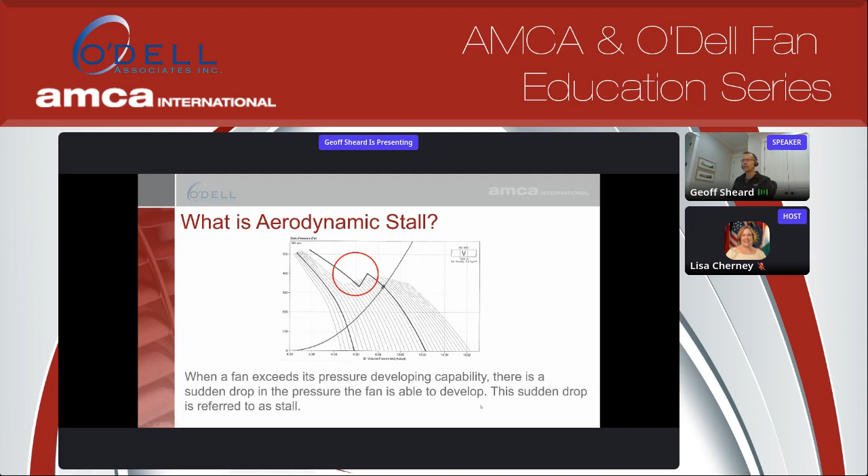It's the practical consequences, so we see the pressure falls with decreasing flow and then recovers somewhat. But what's happening there in practice is that before stall, the flow is going through the blading as intended. As we get to stall, the outlet pressure is higher than the inlet, and it becomes too great for the blading, so the flow starts to break away. That manifests itself as turbulence, buffeting - the fan's simply not operating as intended, and there are a variety of negative consequences associated with that.

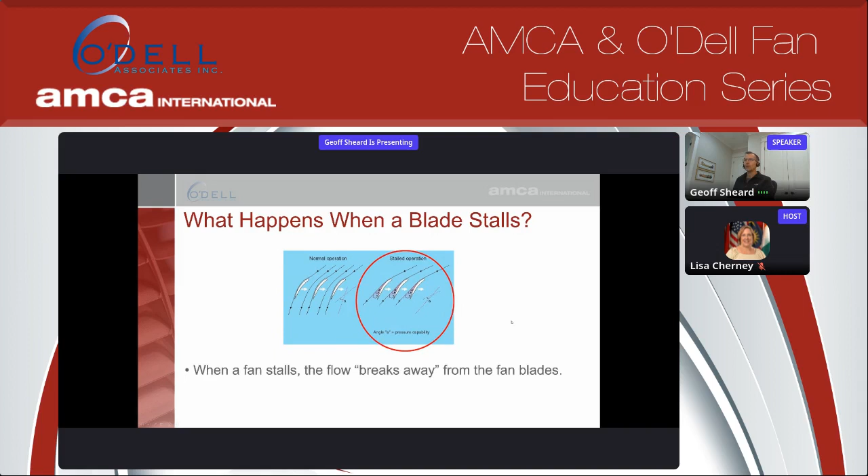It's helpful just to think in terms of different types of fans when considering the significance of stall. If we look at a centrifugal fan over here on the right, number B, the flow comes in axially and out radially. Cross flow fan: in radially, out radially. Mixed flow fan: in axially, out at least partially radially. So an axial fan is unique in that the flow comes in axially and goes out axially.

That's significant because as you approach stall, the flow through the blading slows down. The axial fan impeller is still rotating, so it's thrown out under the action of centrifugal force. So if you have a centrifugal, cross flow, or mixed flow fan, the fact that it's thrown out radially by the simple fact the impeller is rotating is a mitigating factor. In an axial fan, the flow is not supposed to go radially, it's supposed to go axially, and if it does go radially, it ends up on the casing. The outlet pressure is higher than the inlet pressure, so the flow ends up getting driven out of the inlet, which is not what anyone wants.

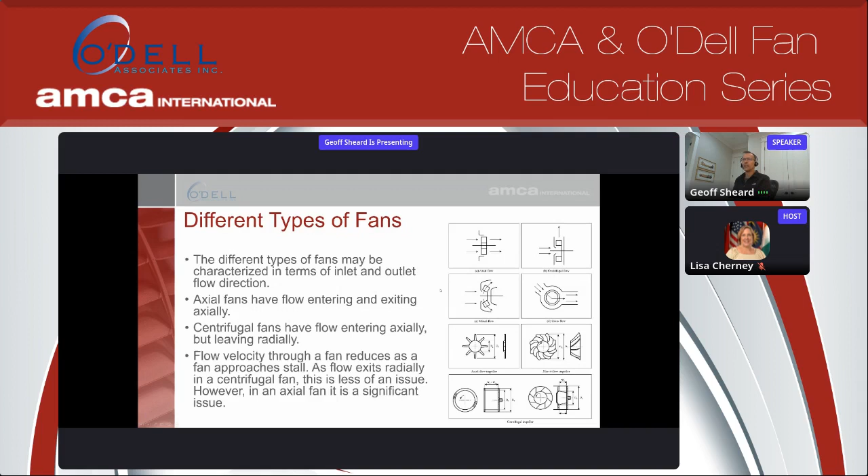So that results in the axial fan having a more severe stall than any other type of fan. It's not to say other fans don't suffer the effects of stall, but it's not generally as severe. We can see that in this next slide - this is a collection of fans with some comparability described here, A through G, and we can see this is your highest pressure centrifugal. It's a steeply rising characteristic, and it only falls very close to shut off. You'd never actually operate a fan here unless you accidentally closed a damper.

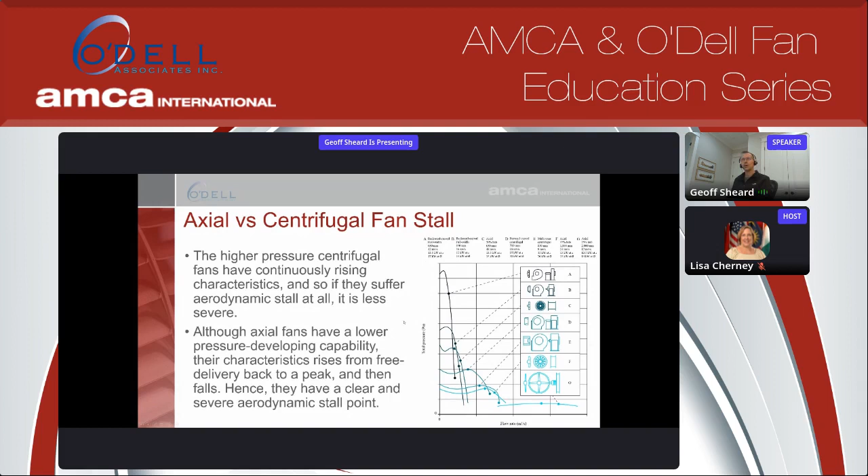But if we look at this typical axial fan here, we're rising and we're falling really quite far from zero flow. There's a lot of opportunity to operate the fan accidentally in this region. So axial fans have characteristics which allow accidental operation in stall more freely than a narrow centrifugal fan. So the consequences of operating an axial fan in stall are more severe, and the probability of accidentally doing so is higher. So that's why we'll really focus on axial fans in today's presentation.

So, pressure pulses. I'll speak about them not because you're necessarily particularly interested in them - they may not apply to the applications you work in, but it's just a way that a fan can accidentally end up in stall, and it's equally relevant to the methods for selection strategies for managing stall.

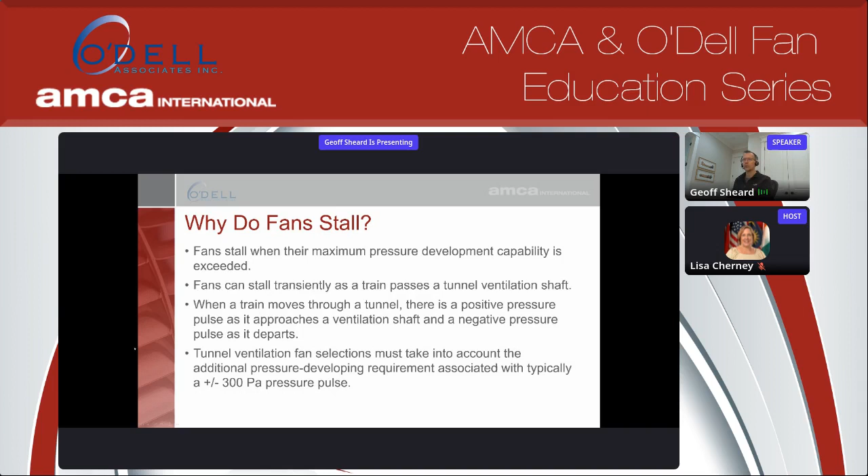When we exceed the maximum pressure developing capability of a fan, it does stall, and that can happen transiently - that will still lead to a failure. So in a tunnel, a metro system, you have tunnels with trains running in them. Typically you have a positive pressure pulse - there's a piston effect as the train goes down the tunnel, so a positive pressure pulse of maybe 300 pascals in front of the train and 300 behind.

One thing that became popular initially in Asia, but also Europe, was the use of platform screen doors. There were some extremely unfortunate accidents where in very crowded stations, people got literally pushed off the platform accidentally in front of trains as they were coming into the station, with a predictable consequence. So these platform screen doors became popular. They remain shut until the train is in the station and the doors are open.

An unintended consequence of this was that the air in front of the train used to be able to disperse in the stations, up to a point. As soon as you put in a series of platform screen doors, you trap the air in the tunnel. So the pressure pulse more than doubled from 300 to 600 or 700 pascals, following which we had a spate of in-service central tunnel fan failures for no apparent reason.

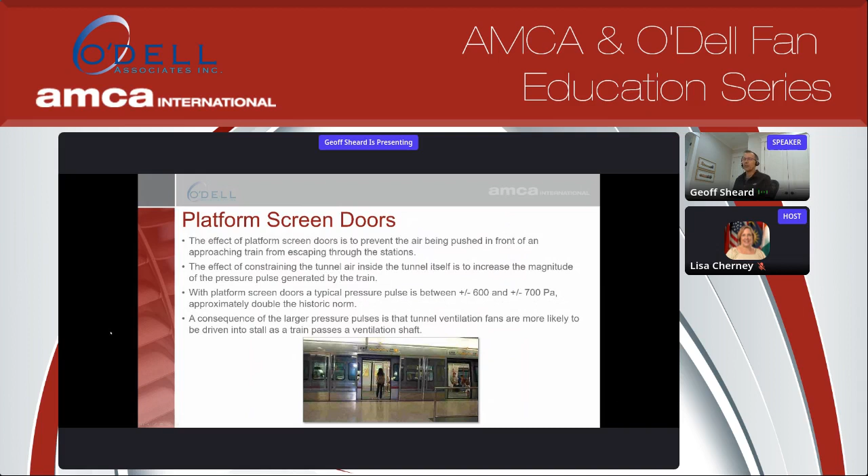So this led on to a keen interest in selection strategies for avoiding stall, and I'll run through those now. If you know what might happen at the time you design the system, then you're in a good position to select a fan appropriately. But pressure pulses are quite difficult to estimate. You don't know if somebody's going to put platform screen doors in 10 years' time, or if a new generation of trains is going to be going faster. Similarly, in any other application, you have similar uncertainties in any system that's going to be lasting for 10, 20, 30 years.

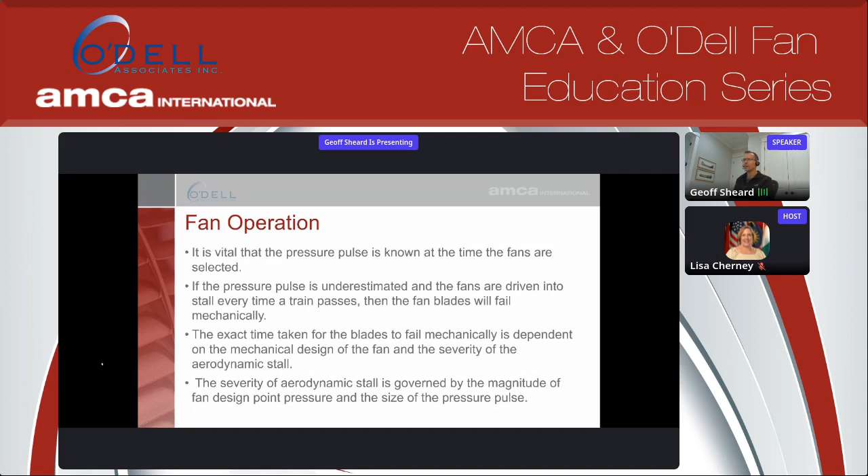We then have another variable in that just because a fan operates in stall, you don't know how long it's necessarily going to take to fail. That's a function of its mechanical design. So it will fail, but not necessarily particularly quickly. So there's a variety of uncertainties associated with the operation. And we have three basic strategies when it comes to selecting a fan.

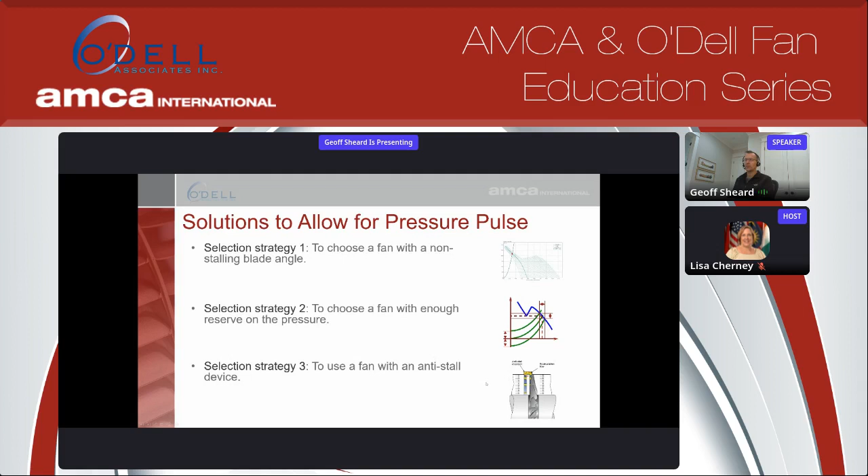One of the idiosyncrasies of axial fans is that at low blade angles, they don't stall. If they're lightly enough loaded aerodynamically, they don't stall. We can simply select a fan conservatively that can generate far more pressure than we think we need. And there are anti-stall casing treatments, which I'll come to in detail later, which can essentially provide some prevention in the effect that one does stall a fan.

At non-stalling blade angles, up to about 16, 18 degrees blade angle on an axial fan, the characteristic simply rises continuously back to zero flow. It doesn't stall - it's not heavily enough loaded to stall. The problem is you can see we're right down at about 2 meters cubed, and we may want to be operating at more like 12. So you're going to need a significantly bigger fan to get up to the sort of flow rates you expect. But nevertheless, if you're willing to spring for that, it's going to be a low risk option.

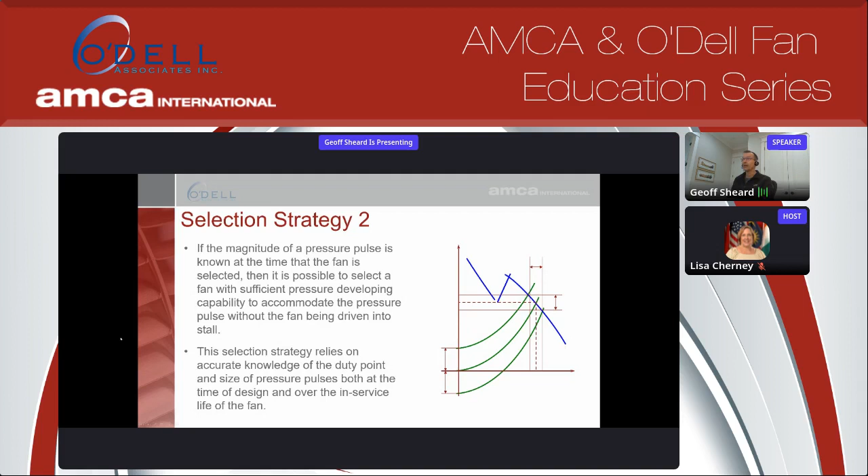If this is our nominal fan curve and these two upper and lower green lines are our pressure pulse, you can simply select with plenty of pressure developing capability above. It's a fair strategy as long as you can predict what's going to happen in the next 30 years. I always feel anyone who thinks they can predict what they're going to be doing more than a year in advance is being very optimistic. But it is nevertheless a strategy that's popular, primarily because it's cheap. We'll come to that later.

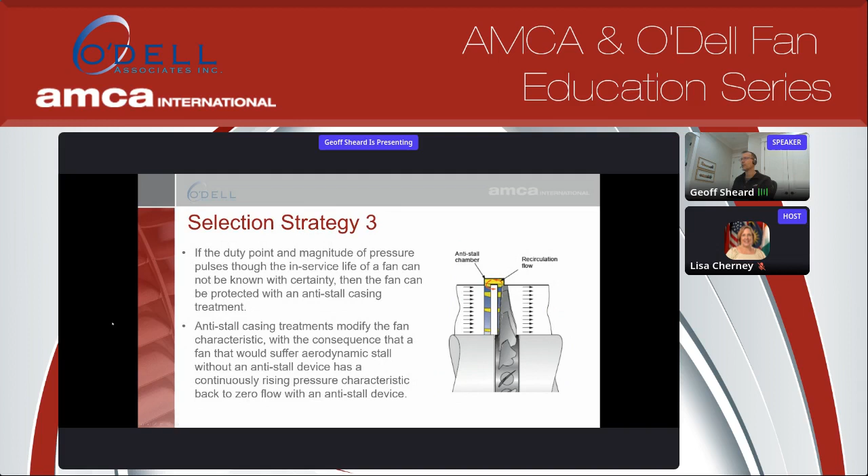Then we've got these anti-stall casings, which I'll explain in a little more detail. They're not particularly intuitive, but they work remarkably well. So if we move on to the anti-stall casing treatment...

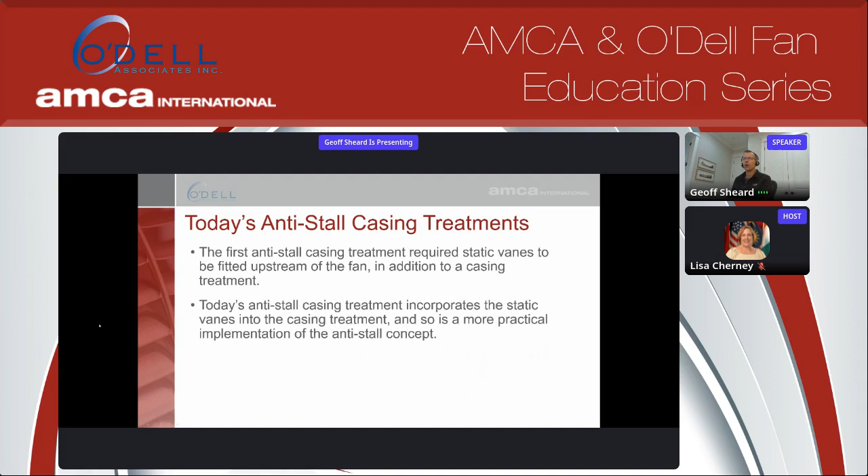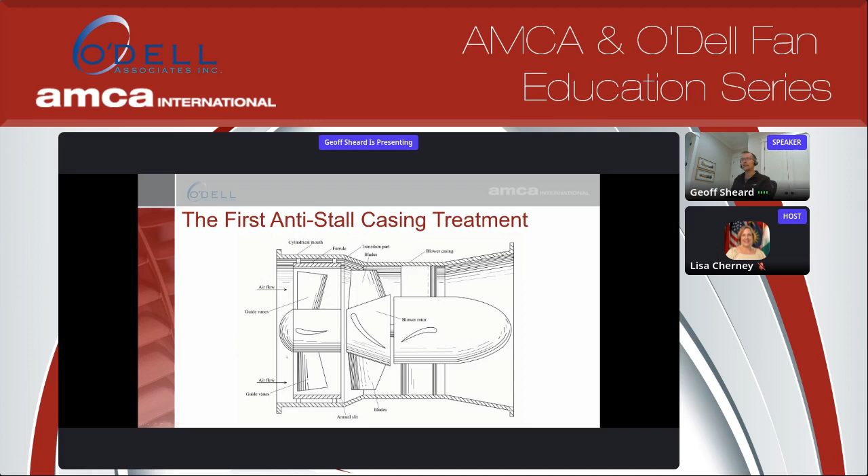It's mildly astonishing that this worked at all, because you'd think that this annular slit would leak like a sieve - it would just not really do its job. But apparently it did work, and was quite popular at the time. But this upstream element isn't particularly cost effective, and it's not good for efficiency.

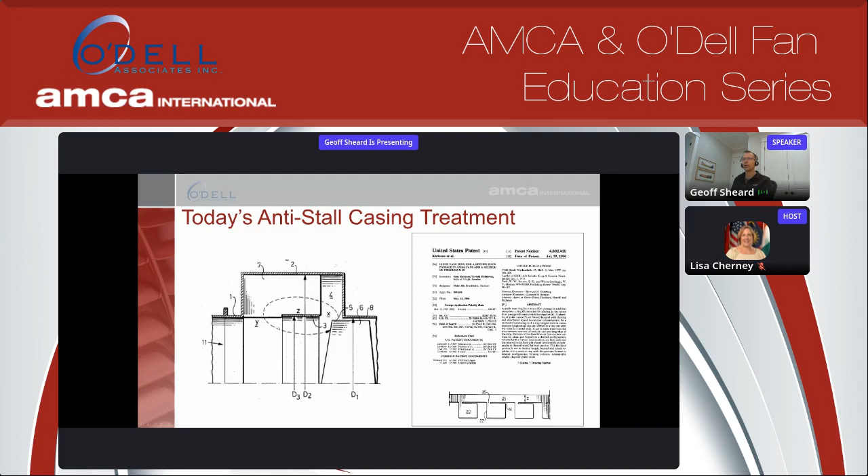There's a gap in the casing here and another gap here. These are vanes which straighten the flow up. We centrifuge flow into this region, it goes upstream and is straightened through these vanes, and then, having nowhere else to go, is reintroduced into the mainstream flow, recirculating back into the fan.

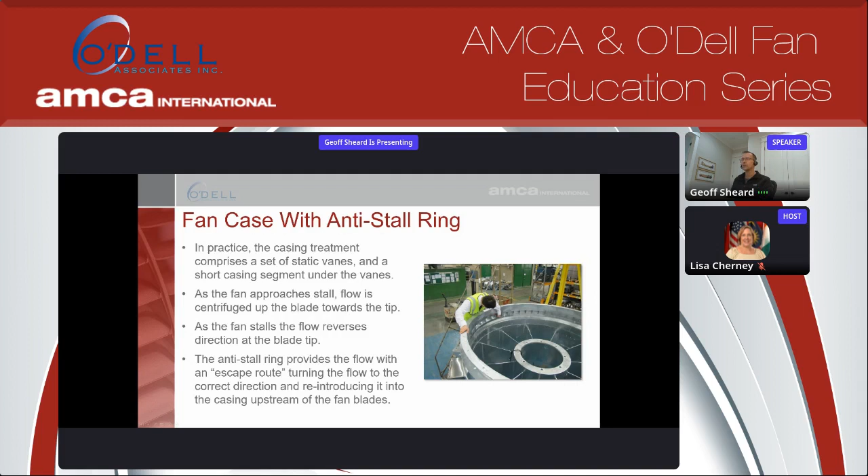This technology was industrialized and became quite routine for many years. It's still specified occasionally. It's worth having a look at how this actually works in practice, because in order to understand why this works, you really have to understand how a fan fails as a consequence of stall.

When the flow separates in the blading, you get turbulence through the blading. You're applying a pressure load to the fan when it's working - pressure's higher on one side than the other. When it stalls, you suddenly release it, so you go from having a load to no load, and then it gets reapplied. That application and release of the aerodynamic load on the blade results in an unsteady mechanical load. The blade is like a long arm, which you're effectively getting hold of the end of and moving backwards and forwards, so where the blade attaches to the hub, there is an alternating stress which can lead to failure.

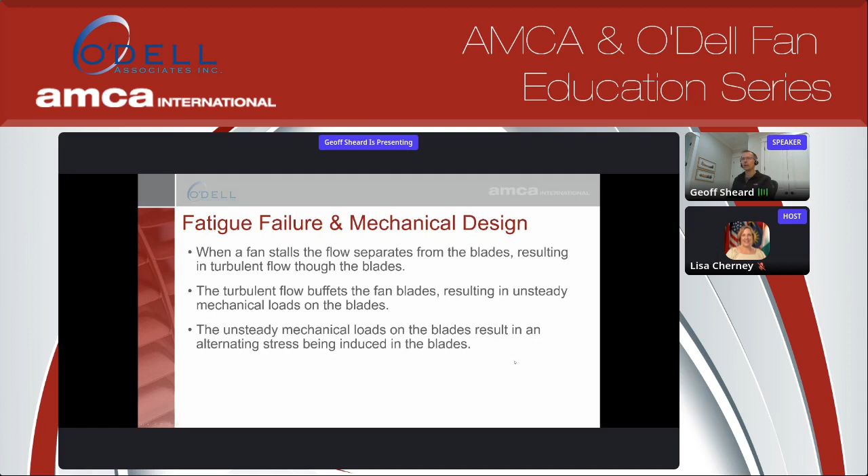Any material can withstand an ultimate load before it breaks. We can superimpose an alternating load on top of that. The way I like to describe it: imagine a paper clip - if it was a single straight length and you pulled as hard as you could, you would not break it. But if you folded it back into a paper clip and unfolded it, folded it again and unfolded it, after 3 or 4 repetitions it would literally fall into two pieces with almost no effort.

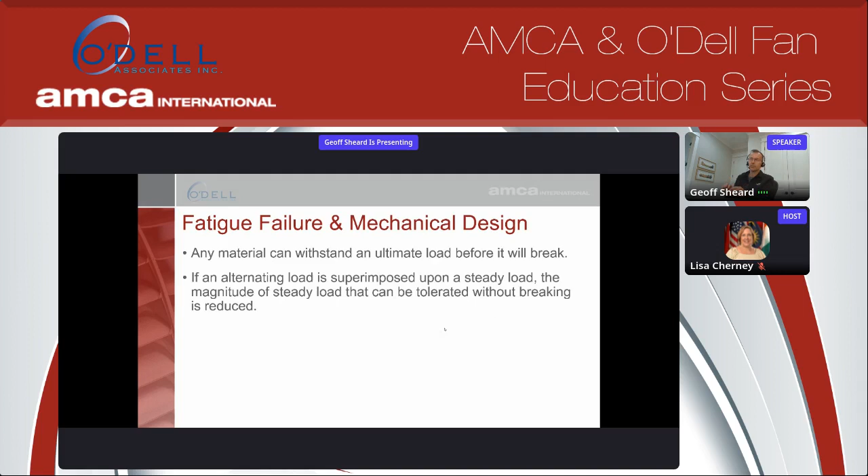That's because the alternating load was creating plastic deformation in the paper clip. So we can only withstand so much alternating load before the metal will actually break - fracture mechanics comes in later, but at this point,

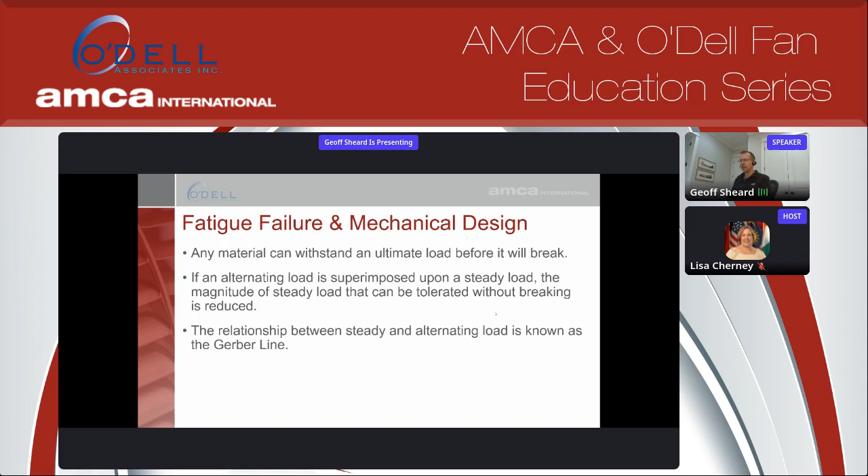it's really this guy called Gerber, a German engineer, who came up with a relationship between steady and alternating stresses called the Gerber line, which effectively says you can pull with no alternating stress - this is the ultimate tensile strength of the fan. With no direct stress, you can have this alternating stress, and you can effectively trade the two. The significance here is that when you're running a fan, you have mean stress due to centrifugal force, but very little alternating stress.

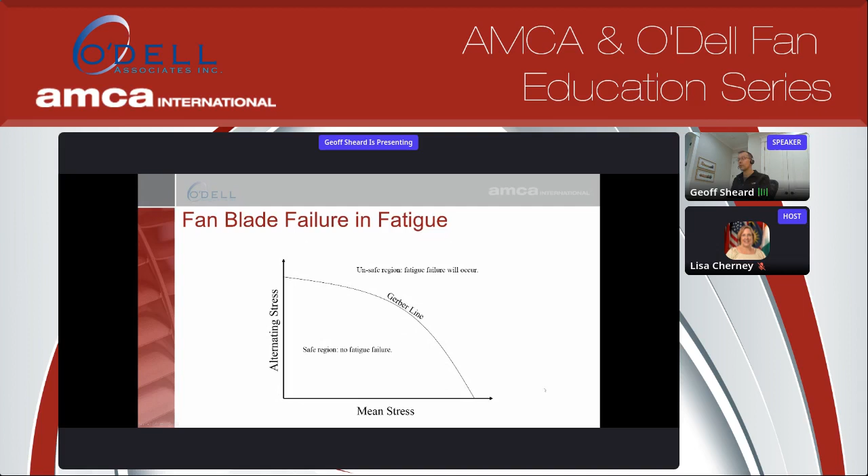So you can probably operate up here because you have so little alternating stress. As soon as the fan stalls, your alternating stress shoots up. So if you're operating here, you would end up in a situation where the combination of alternating and mean stress will cause a failure. That's really why operating in stall is such a bad idea.

Coming back towards the anti-stall ring, its protection is in the diminishment of the alternating stress.

There's a number of design issues for the fan designer. The Gerber line is something that has to be derived empirically - there's no theory, so you have to do a whole series of laboratory tests. It's a function of material properties and defect size, so you have to know the maximum defect size, and the quality control in your blades and your hubs becomes important.

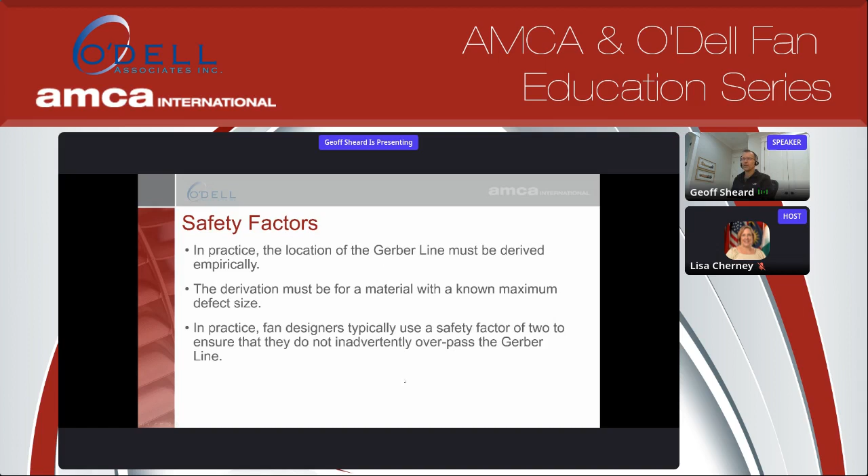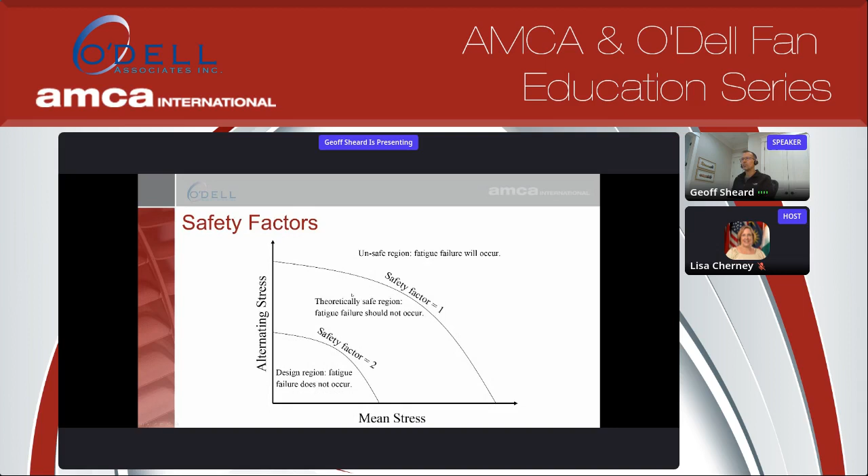Because of this uncertainty, designers such as myself generally divide whatever we think we can withstand by 2. So we have a design region where we've divided alternating and mean stress by at least 2 to get a design zone. If we got our Gerber line correct, this theoretical design zone should be okay, so we shouldn't see a failure, and here we're pretty sure we will. This really brings us back to the effect of the anti-stall ring.

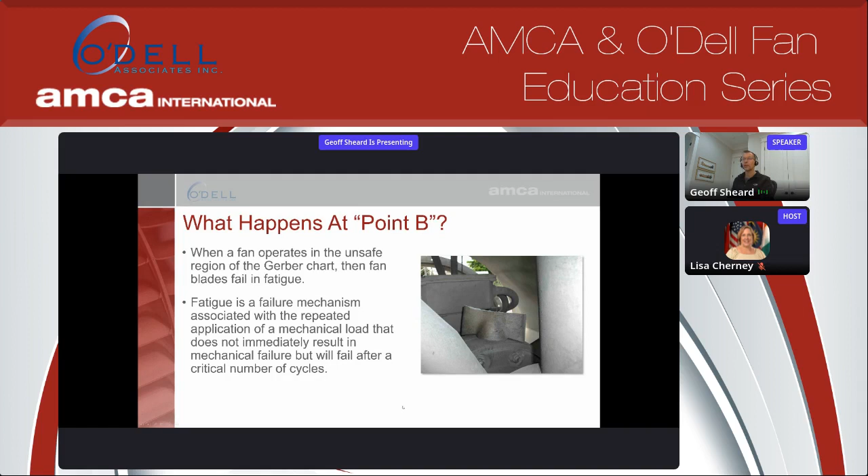There's a complete predictability that this will happen. It's just a question of how long, which is the detail of the mechanical design of the fan.

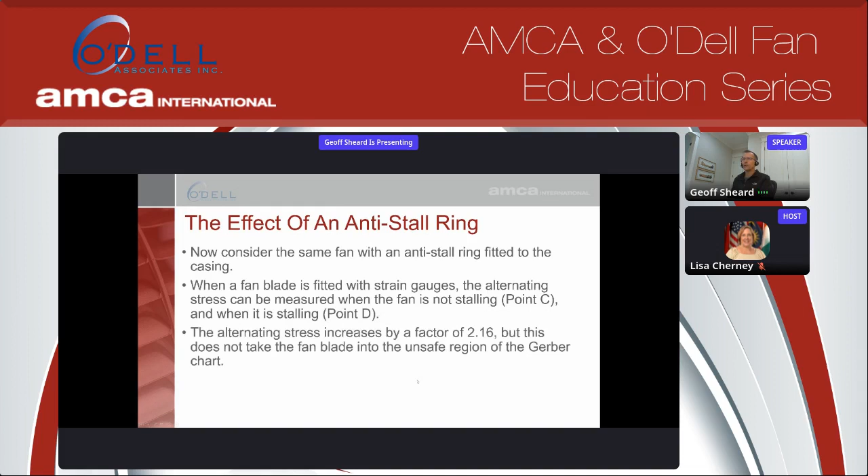So if we look at the effect of the anti-stall ring, this is really both aerodynamic and mechanical. So we can look at the same curve that we were looking at previously. With an anti-stall ring fitted, the stresses were lower, the alternating stresses were lower.

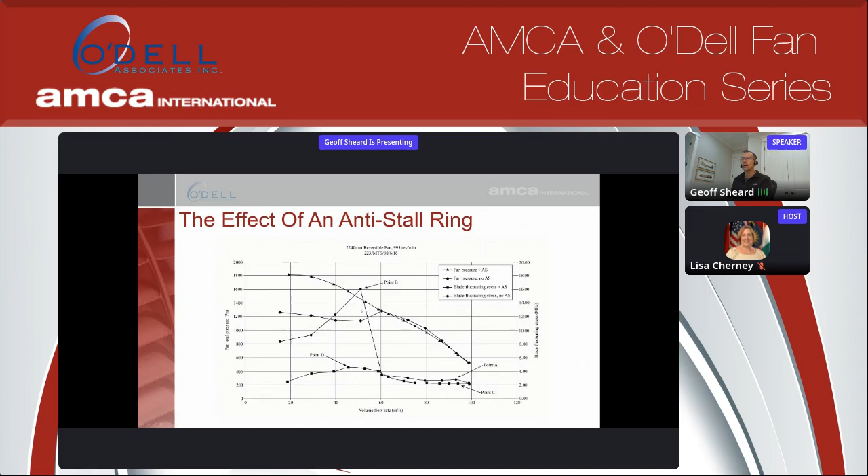And at the risk of stating the obvious, you only need one to fail. So if you've got 12 blades in a fan, and a dozen fans on a job, that's 144 blades. If you missed one defect on one blade, and you end up in a situation where the fan is driven into stall semi-regularly, it will go on to fail. And then that fan is trashed.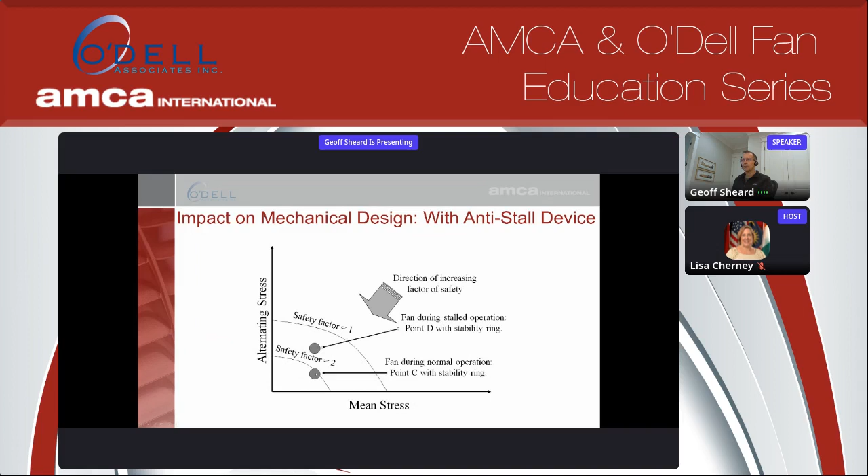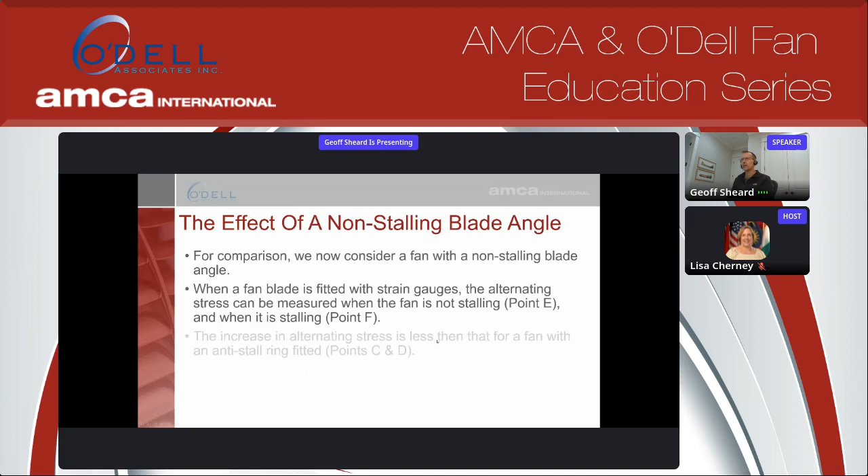Our safety factor diminishes. So if we just consider, for the sake of comparison, a non-stalling blade angle - that was our third option, our first option actually in my presentation. I've stripped out the stalling blade angle because this graph was getting awfully cluttered. So this is our non-stalling blade angle.

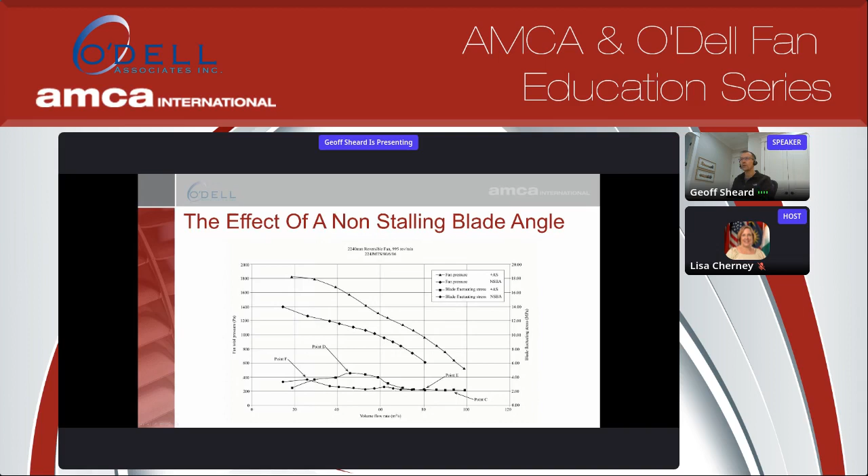C to D was the stress. We're not generating as much pressure with a non-stalling blade angle. It's a lower blade angle, the fan's not working as hard, and we're now going from point E stress-wise to F.

What I was going to do now is show one problem I'd like to touch on: oftentimes fans are run at reduced speed, half speed maybe, when the requirement isn't so great. So what we've got here, we can see our stress is lower with a non-stalling blade angle fan. So if we wrap up all the other things we can do, we can run at half speed at night.

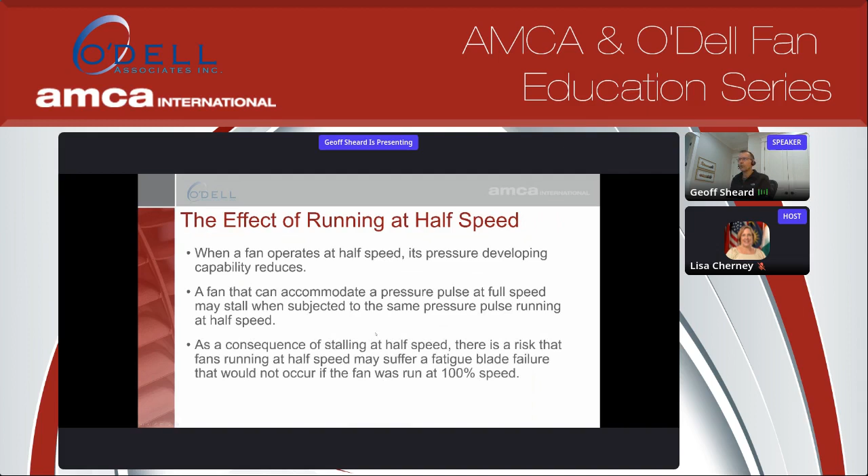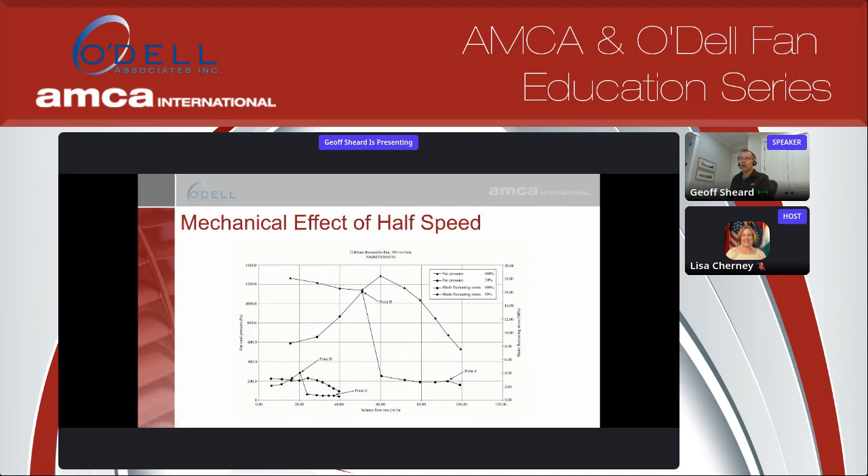What are the consequences of that? Well, we're more likely to end up in stall. So at half speed, we scale the performance right down. This could be useful to ventilate a building at night. We can see our stresses have dropped enormously, but then the amount of fan air we're moving has dropped. If that's enough at night or on a cool day, then this might be a desirable operating regime.

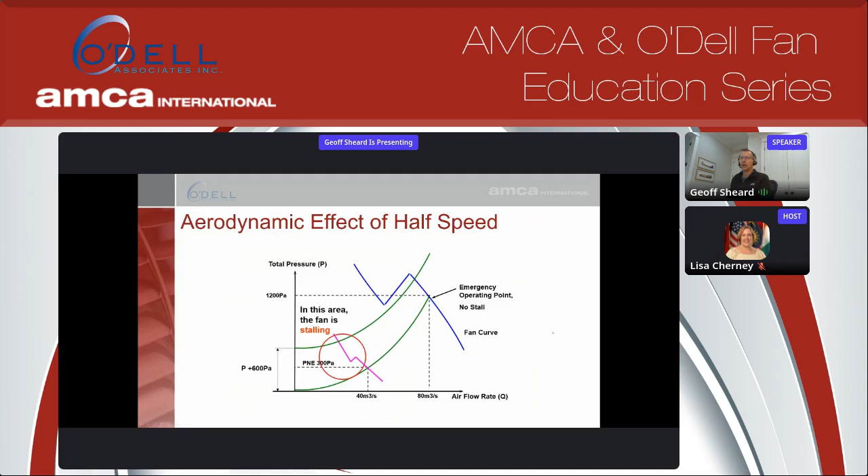But the point here is we didn't go into stall at full speed, but at half speed, the same pressure pulse or the same event has just overwhelmed the fan. So again, what I'm doing here is just wrapping up various failure modes that I've run into over the course of my career.

One time I did actually end up running fans at quarter speed because at night half speed was too noisy and it annoyed the neighbors. By the time you get down to quarter speed, the fan really isn't doing much at all - you've got not much going on. But if that's enough to ventilate a building, it can be a desirable operating mode.

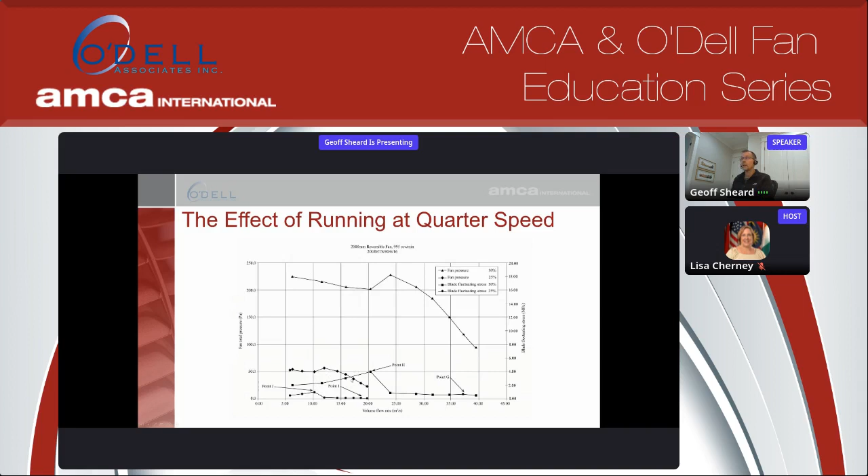So what I've done here is go through and work out what the safety factors are. At the beginning of this presentation, we had 0.3 of a safety factor in stall and 2.3 as a safety factor with a plain casing running at 100% speed. And so anything below 1, we're in danger of failure.

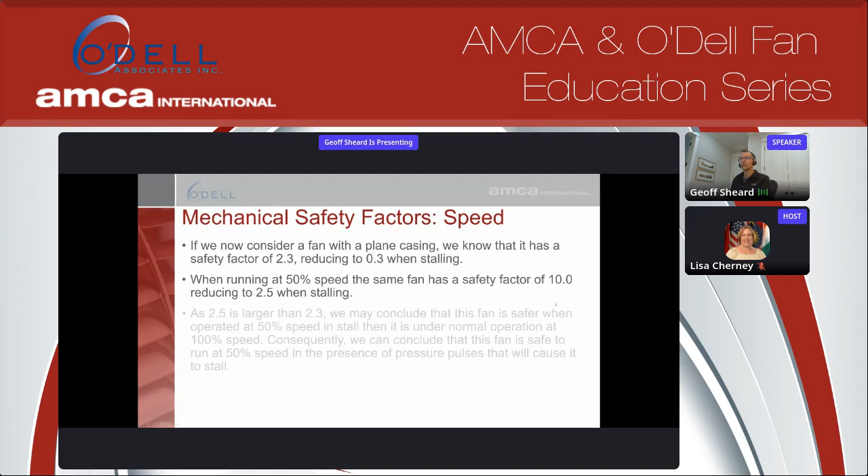Considering the effect of part speed, if I just jump through to the table: at 100% speed, same safety factors again, 2.3 normal, 0.3 in stall, so that's not good, it's below 1. An anti-stall casing at 50% speed, we're looking at a safety factor of 10 and 2.5 in stall. So at 50% speed, we've got good safety factors with an anti-stall casing.

Then 25% speed with a plain casing, 106 versus 7.3 - so again, really no risk at all. So this is just an attempt to lay out the consequences. Specifically, we want a safety factor of over 1 in stall when we're at less than 100% speed.

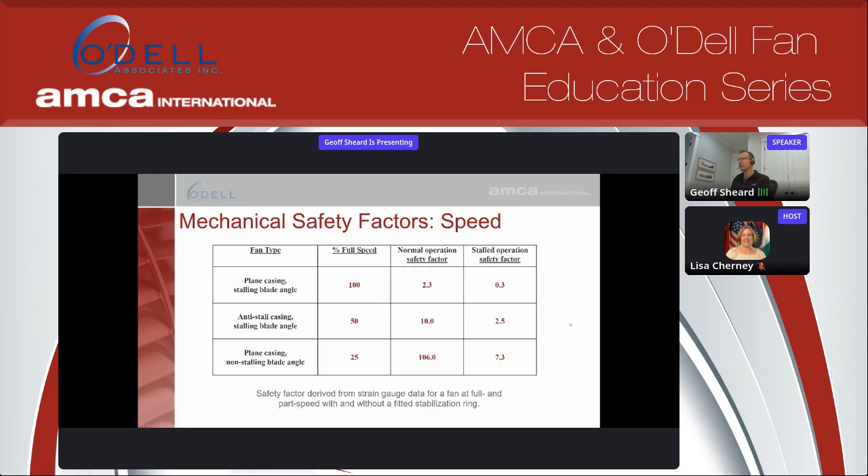So again, apologies for the speed I'm going through this - we just only have so much time today. There is supplementary material if this is directly relevant to something you're doing and if I've blown through it a little bit too quickly.

So some practical examples and cost implications. These different strategies that I've outlined - a fan that can generate high pressure so it won't go into stall, an anti-stall casing to protect the fan in the event of stall, and a non-stalling blade angle - have implications for both the capital cost and the operating cost of the fan.

My assumptions here may not be relevant to any future project. This is a typical duty point for a central tunnel ventilation fan. Typically they have a high temperature requirement, and they're also used to ventilate the subway during normal daily operation, typically 12 hours a day. I've picked a cost of electricity, a cost of capital, and a period of assessment of 10 years. I'm not saying this would be your cost of electricity, capital, or 10 years, but they're not unreasonable.

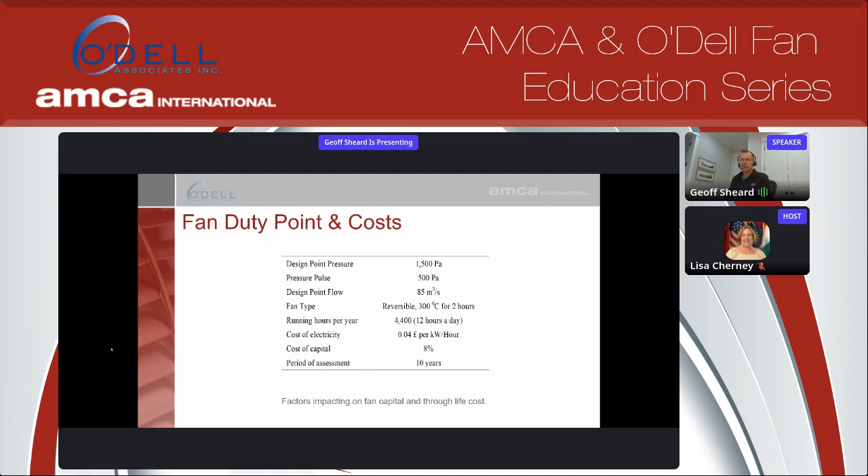So it provides a basis for making an assessment of the relative merits of these different selection strategies. So if we look at non-stalling blade angle...

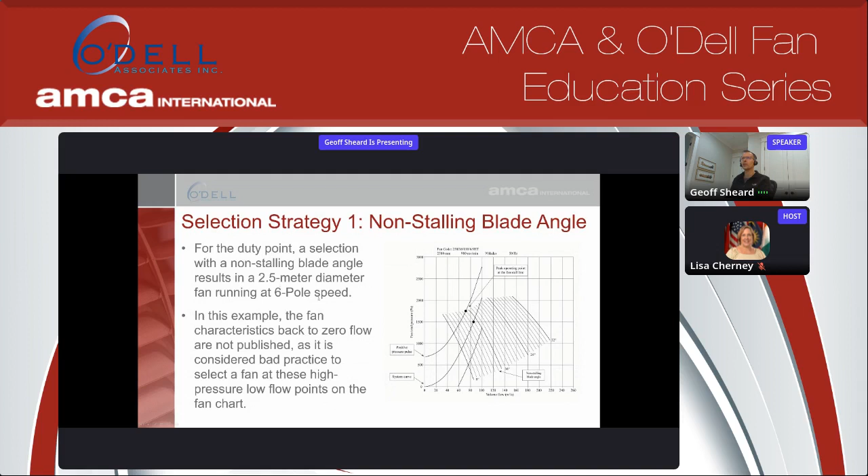Anything below about 18 degrees is non-stalling. Here we've selected at 15 degrees. Typically the curve isn't published back to zero flow because it's bad practice to select in that region. So this would be a typical non-stalling selection where you're selecting at the edge of the allowable selectable range. Note here we've got a 2.5 meter 6-pole fan. Here we've got a 1.8 meter 4-pole fan, it's going faster, and that is why it's generating considerably more pressure.

But at around 24, 25, 26, 27 degrees, this fan most definitely will stall and stall badly, and if operated in stall will fail quickly. So we've got a good margin here, and 1.8 meter fans are cheaper to build than 2.5 meter fans, and 4-pole motors for the same power are less expensive than 6-pole motors. So the motor, impeller and casing for this fan are considerably cheaper than for the larger, slower, non-stalling blade angle.

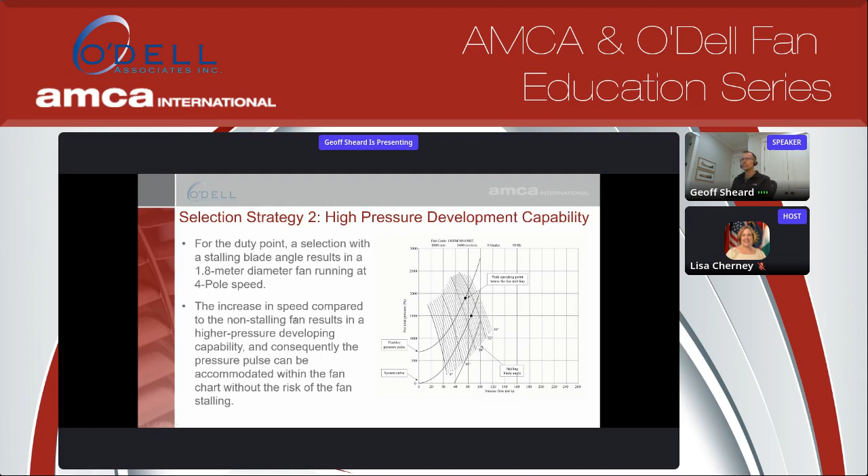With an anti-stall ring, we've deliberately selected in the stalling range. Technically we haven't selected in the stalling range - we've selected in the stable operating range with a reasonable margin, however, knowing that a pressure pulse will drive us into stall. So it's a valid selection. We simply know that the circumstances in the application will drive us into the stall region.

So this is a stalling blade angle. The pressure pulse will take us into the stall region, and we are assuming that the anti-stall ring will prevent the fan suffering a mechanical failure. This one is in between the two - it's a 2.24 meter diameter casing with a 6-pole motor.

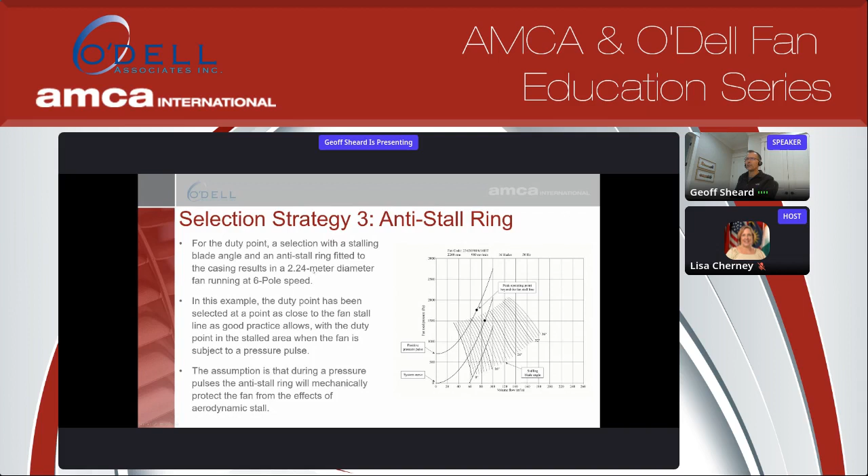It's almost as expensive as a 2.5 meter, probably a very similar price, because these anti-stall casings aren't cheap. So the 6-pole motor will be the same price. That 2.24 meter casing plus the cost of the anti-stall ring is probably getting you to the cost of a 2.5 meter with a plain casing.

So if we look at a through-life cost, they're all selected with slightly different duty point efficiencies. They've all got a different capital cost because they cost a different amount. They'll use a different amount of electricity per year because they've got different efficiencies, and so we will end up with a different cost of ownership over 10 years.

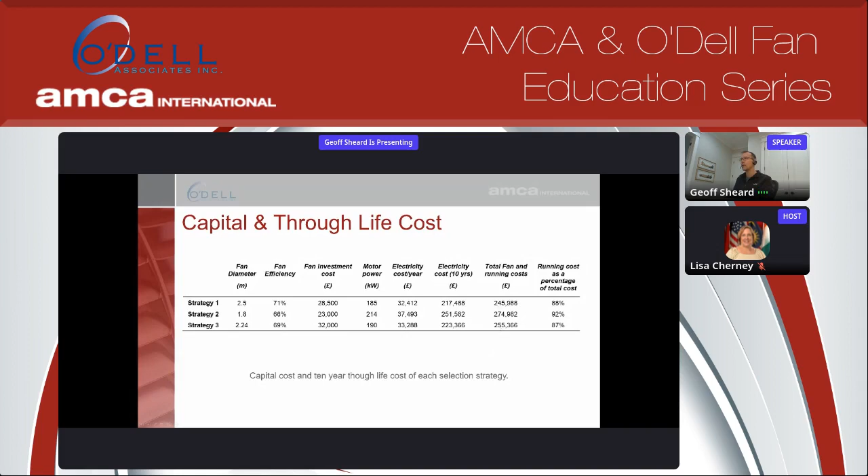So I think perhaps the most direct measurement is to look at the total cost of ownership over 10 years. These are different, but if you think about it, this 1.8 meter fan is the most expensive to own over 10 years - it's the cheapest to buy. What isn't included here is that the 2.5 meter fan, if it's going underground, is going to need a bigger plant room than either of these other two, so the cost of digging a bigger plant room underground could overwhelm these costs quite easily.

So, conclusions: we've got three selection strategies to help avoid stall. There isn't a correct approach. The anti-stall ring is popular in some areas - it does reduce the impact of stall, but it doesn't give you complete protection.

Alternating stress levels of a tested fan did increase significantly when driven into stall, but it still provided a good level of protection. So they do work, but they're not perfect. The mechanical design has to account for the effect of stall.

So it's important. If you've got any concerns about the fan company you're buying fans from, just start asking them a few questions about the mechanical impact of alternating stress and their approach to fatigue, failure, and fracture analysis. You'll soon find out if they know what they're talking about.

Good quality control, X-ray inspection and such like is important. So asking for records of that in any specification is helpful, can help reduce your risk.